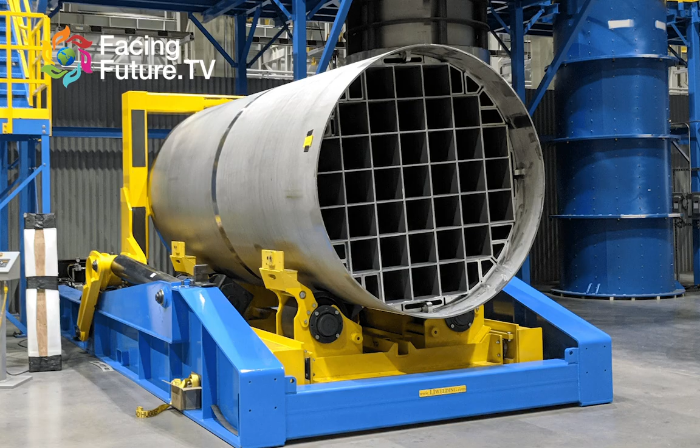Let me start by sharing an image of the thin-walled canisters. This particular one is manufactured by Holtec International, and this is what's used in the United States.

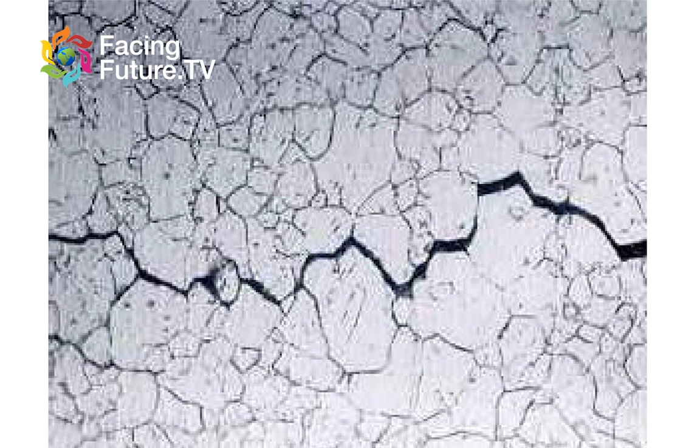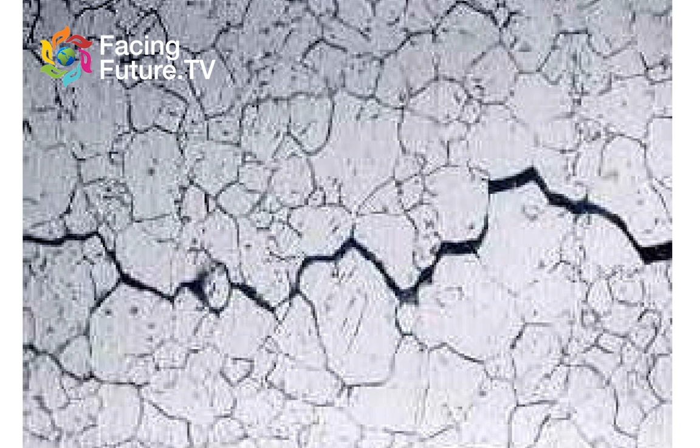Notice the walls are very thin - it's a half-inch thick wall, and that is our protection from nuclear waste in the United States. I want to go on to this image and ask you to explain what we're seeing here. Well, the Nuclear Regulatory Commission says that these canisters, they're stainless steel, are vulnerable to cracking, and this is a microscopic blow-up of what the cracks look like.

This isn't an actual canister, but this is the same material. And once a crack starts in stainless steel, it continues to grow through the wall undetected. The NRC told me, and they've put this in writing, that it will take about 16 years for the crack to grow through the wall.

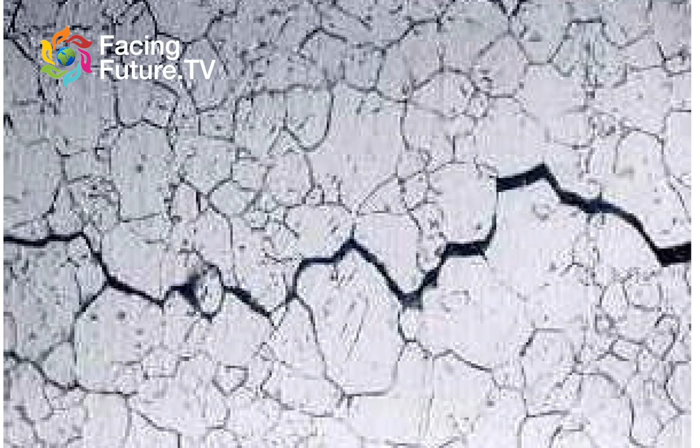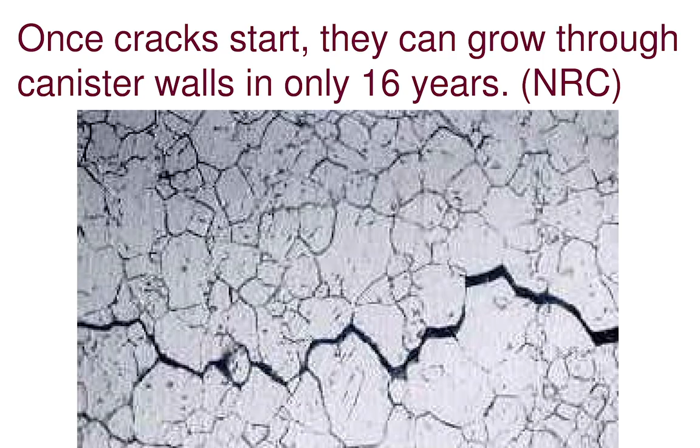Now, I always like to explain the acronyms - NRC is the Nuclear Regulatory Commission. They stated that once a crack starts, it will continue to grow through the wall, and it will take about 16 years to grow all the way through. I was actually at a meeting when they said this, and I was shocked that they have no plans to be able to find the cracks or repair them. This was unbelievable information, but it's true. And unfortunately, we have about 3,200 of these canisters currently installed around the country.

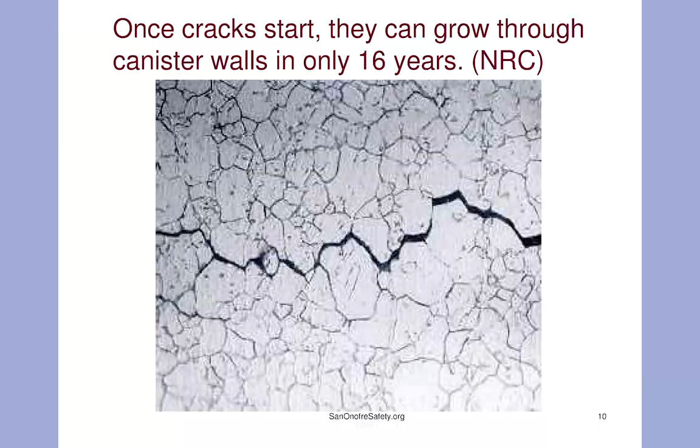Again, to be fair, this image is not of one of these canisters cracking, but of similar stainless steel subjected to conditions similar to what the canisters are subjected to. Is that correct? Correct. So that's not actually one of these canisters in use, but as we'll learn in a few minutes, this could be happening invisible to us, with no way of detecting it.

And some canisters are already 27 years old - the ones at Calvert Cliffs in Maryland are already 27 years old. And the only thing the NRC has done is eliminate the requirement for them to measure radiation levels at these outlet air vents where these canisters are stored inside.

So rather than enforcing greater inspection and regulation, they've eliminated the requirement to measure? To measure radiation out of the air vents - we're going to go into the air vents later - but to measure the radiation where the highest levels will be with through-wall cracks, yes. That's their answer to nuclear safety, is stop looking. Exactly. Hide the leaks from the public.

This is the Nuclear Regulatory Commission that you and I know is called a captive regulatory agency, because they are pretty much controlled by, owned by, the industry they're supposed to be regulating.

Well, you have 5 NRC commissioners. They are appointed by the president, but they have to be confirmed by the Senate. And when Obama was president, he could only get one safety-conscious commissioner approved through the Senate. That's part of our problem - because the Senate was controlled by the Republican Party, or perhaps by industry lobbying of the Democratic Party as well, to be fair. Well, it would be interesting to see how things change, but it's kind of been historical that the Democratic Party puts more safety-conscious commissioners forward.

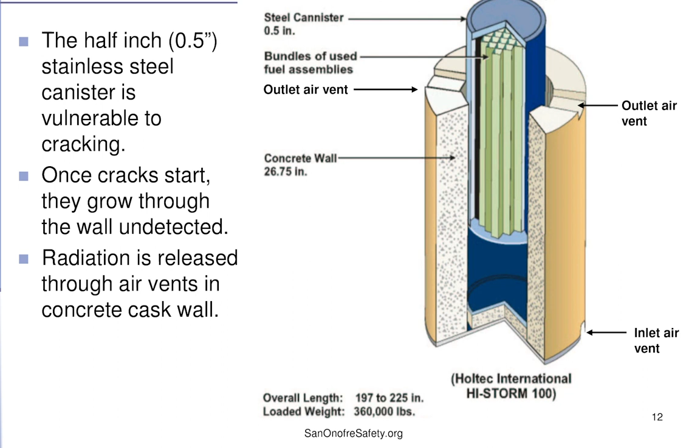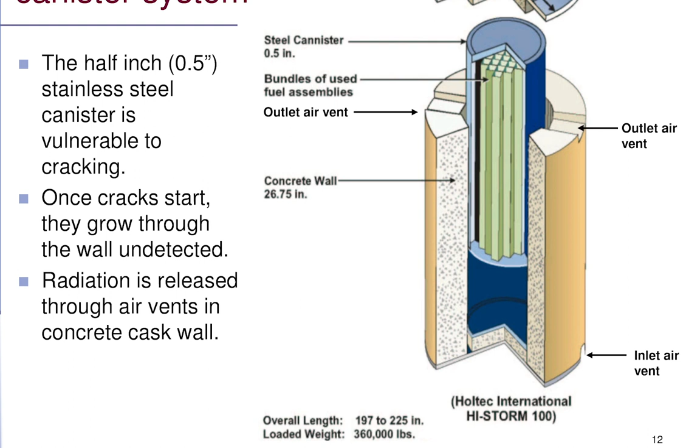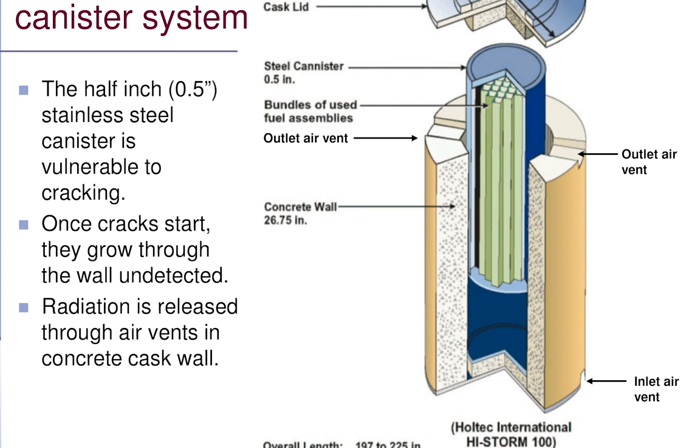So what are we looking at here? What we're looking at here is a typical canister used in the United States. This is an above-ground canister. The blue is the thin-wall canister, half-inch thick, stored inside a concrete cask with a steel lid on it. The thin canister doesn't stop gamma rays and neutrons, so it always has to be surrounded in something like thick concrete, or you would die if you stood next to it.

And the problem is there's air vents in that thick cask. You'll see inlet air vents at the bottom and outlet air vents at the top. The air goes in the bottom, comes out the top, and that's critical to cool this canister and the fuel,

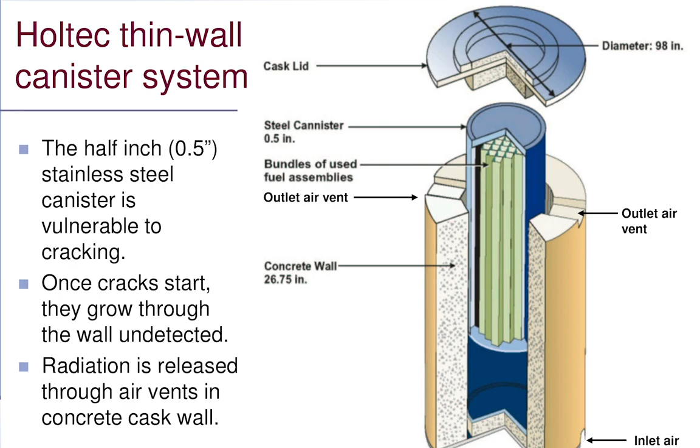because the canister is hotter than a furnace, and it has to be continuously cooled. So these canisters now are sealed, and they are welded shut. They're not bolted. They can't be opened.

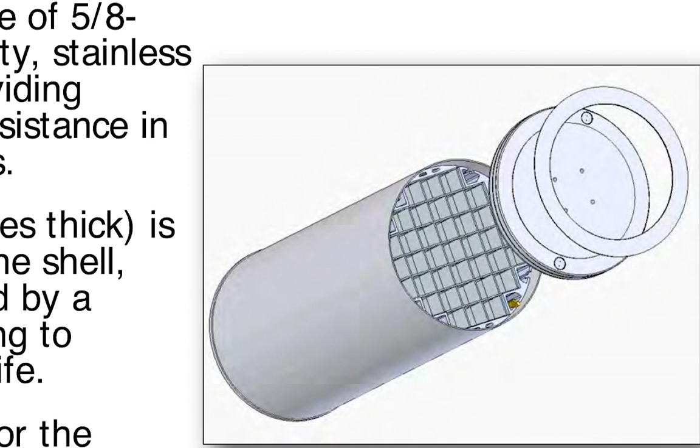These are pressure vessels, yet they have no pressure monitoring and no pressure relief valve. The Nuclear Regulatory Commission gives exemptions from typical safety standards that people have to meet with pressure vessels.

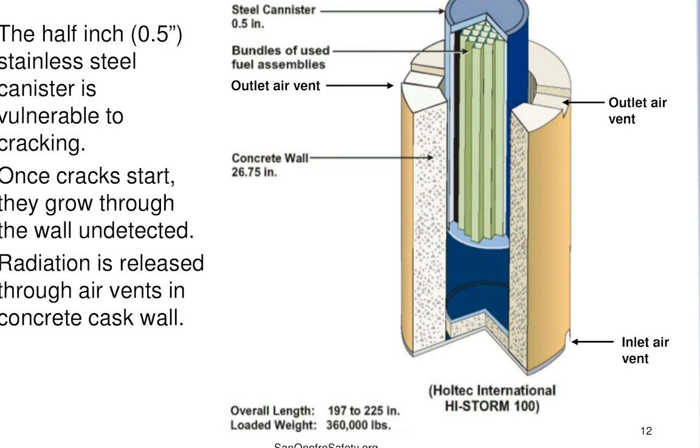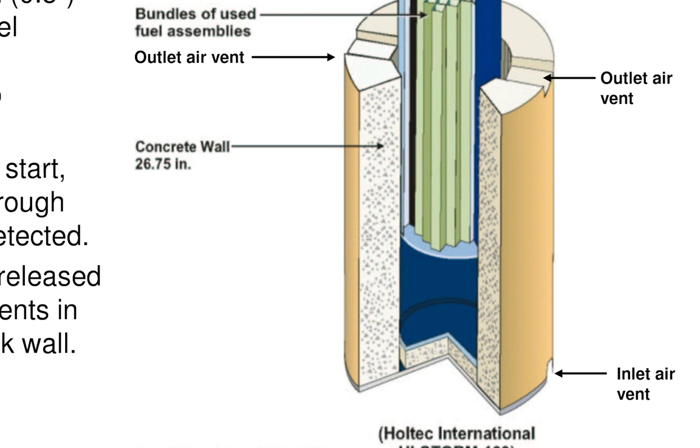I want to call everyone's attention again to the fact that there is airflow required to come in through the bottom, cool air, and warm air out through the top, because these waste storage fuel assemblies are still hot when they're put in there. If these thin-walled canisters develop cracks and there is a leak, that leak will come out naturally vented through air convection. Let's take a look at the assemblies themselves.

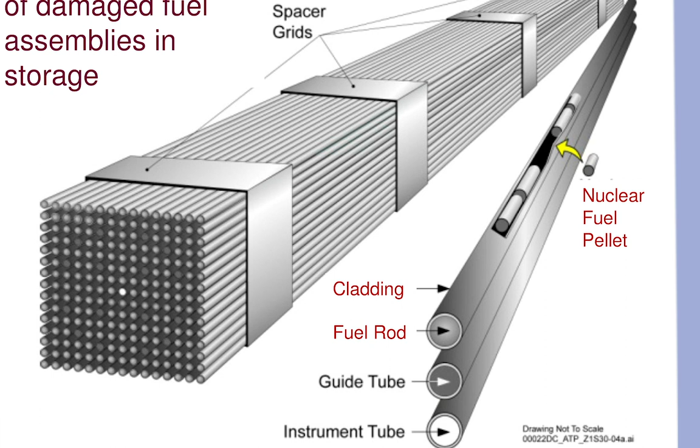So these are the nuclear fuel assemblies. A fuel assembly is made up of those rods you see to the right. The nuclear fuel pellets, these are uranium pellets, are inside. They're stacked one after another, about the size of a pencil eraser. And those rods with the fuel pellets in them make up that one assembly.

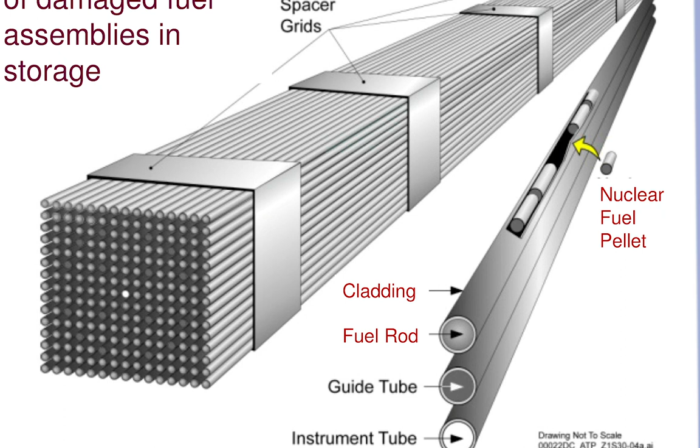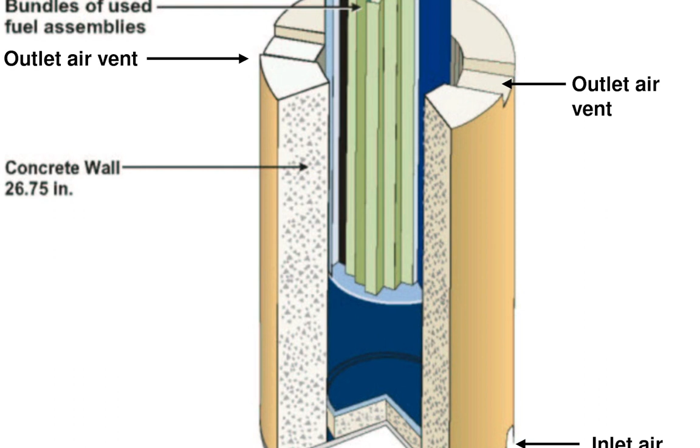So there's a whole bunch of fuel rods in one assembly. You've got perhaps several hundred rods grouped together, and within each rod there's dozens or perhaps 100 or more of these tiny little pellets. That is what the green honeycomb you called it before is. Right. And there's usually 24 to 37 fuel assemblies in one canister.

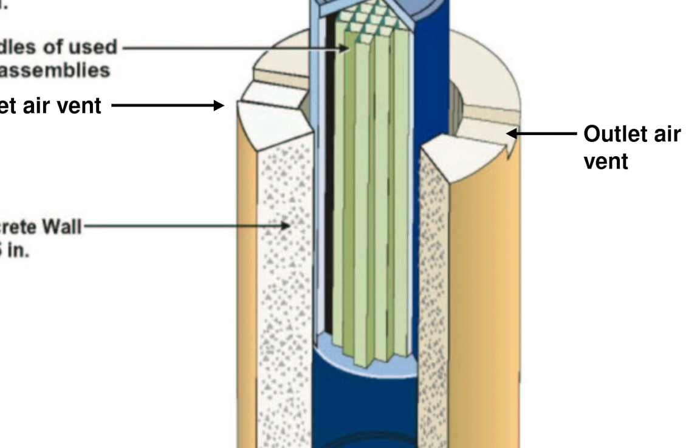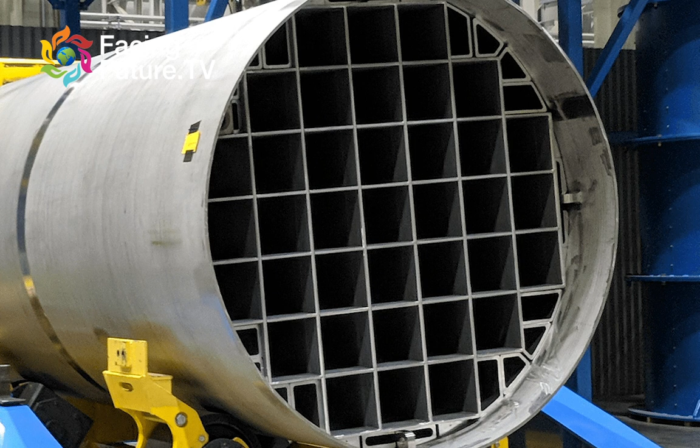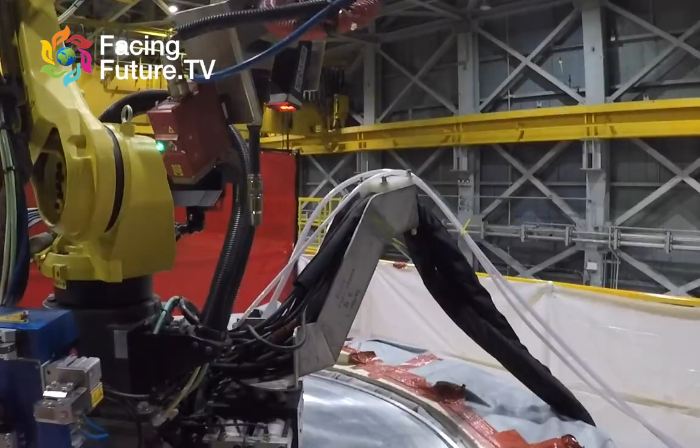Okay, I'm going to skip around. I want to go back to the beginning, that initial photo we showed. There you're seeing the holes in which those assemblies are loaded. They call that a basket, a fuel assembly basket, and each fuel assembly bundle goes in, one in each slot. Then a cover is put on and it's welded shut. They have a thick stainless steel cover, and it's welded shut.

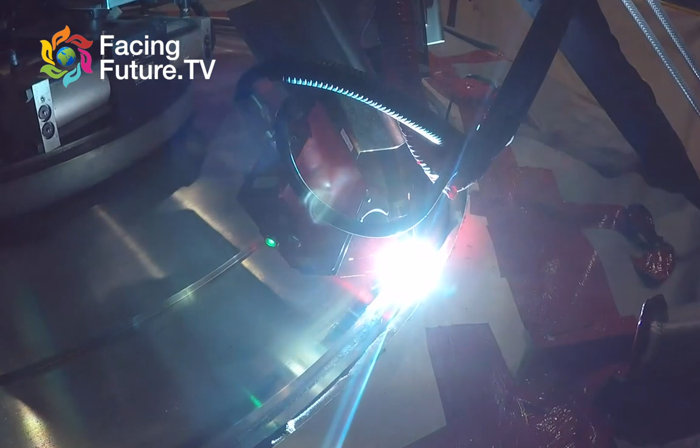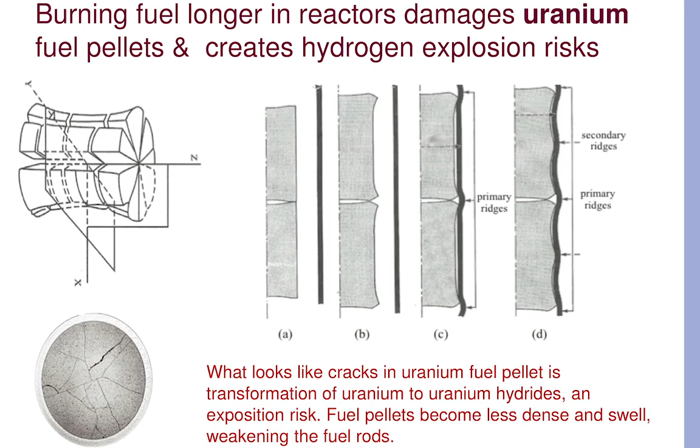And the fuel is not adequately inspected before it goes in, and it actually degrades during dry storage. When you burn this fuel in the reactor, you end up creating highly radioactive fuel rods, with the cladding and the fuel pellets getting damaged and building up hydrogen in them. The big concern is that these may fall apart during storage or in transport.

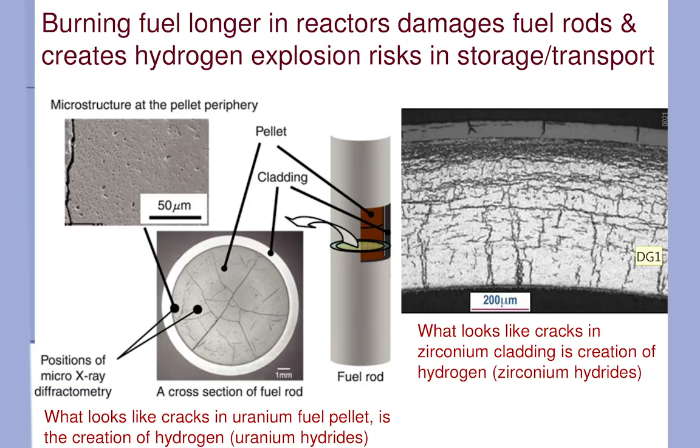The NRC is actually concerned. They don't know if these rods, with normal train vibrations, would withstand a trip on a train somewhere else. They've already been stressed out by the radiation coming from within, from those little pellets.

And the canister is filled with helium so that nothing explodes, because you don't want oxygen in there—that's an explosive thing to have in this system. So they fill it with helium because it's an inert gas, but they have no way to know if the helium is leaking out. They have no monitoring system to know what's going on.

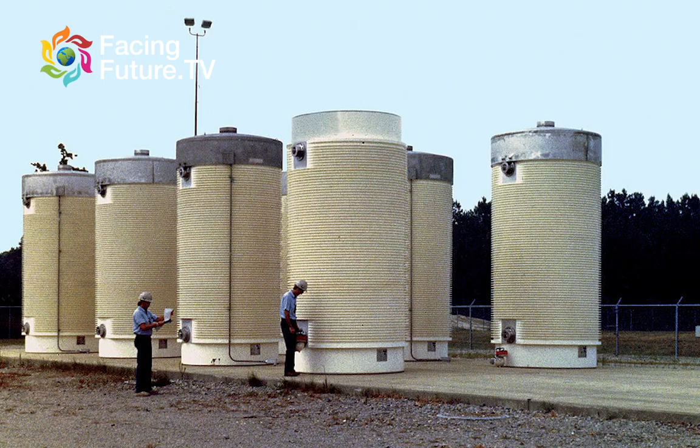And they only check the radiation levels from the air vents once every three months. They walk around with a monitor on a stick and check it. But now they're only checking the inlet air vents, where radiation levels would be lower. There's some radiation that comes out of those vents anyway.

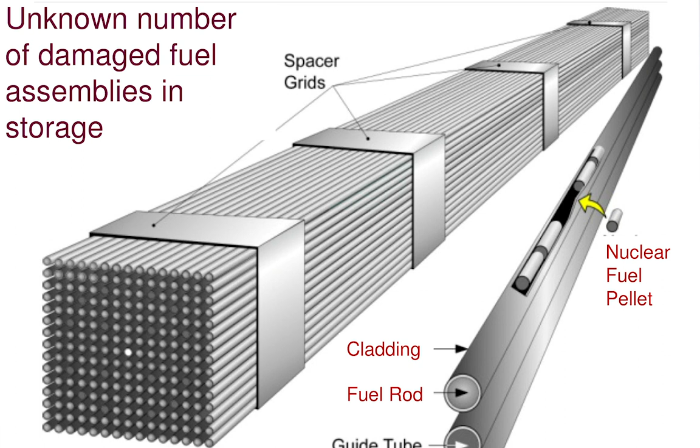They do monitor for temperature—there is temperature monitoring, but none of that monitoring is going to give you a warning. There's nothing that alerts you soon enough to do anything about the problems. We will only know after it's too late, after major radiation leaking is happening. We won't know before, and then we'll only know if the NRC tells us or if the canister explodes.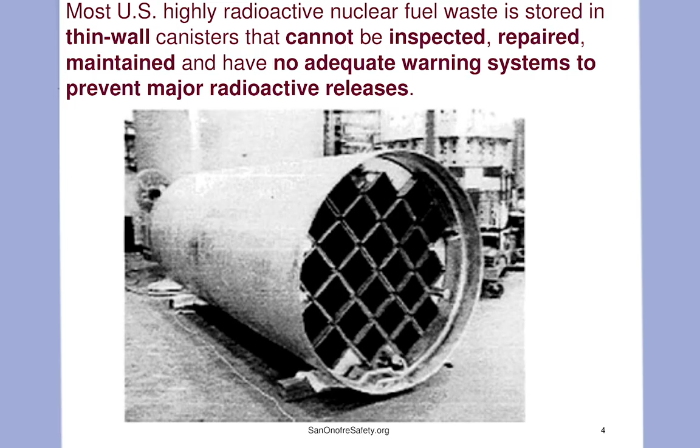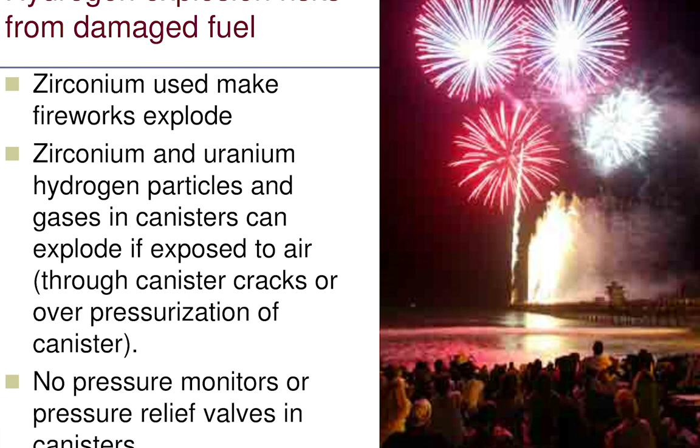So they're vulnerable to hydrogen gas explosions. If air or water gets in, you have a potential issue of an uncontrolled nuclear fission reaction if water gets inside. We have two potential classes of problems there. One is that there may be an invisible leak of radiation of potentially major proportions.

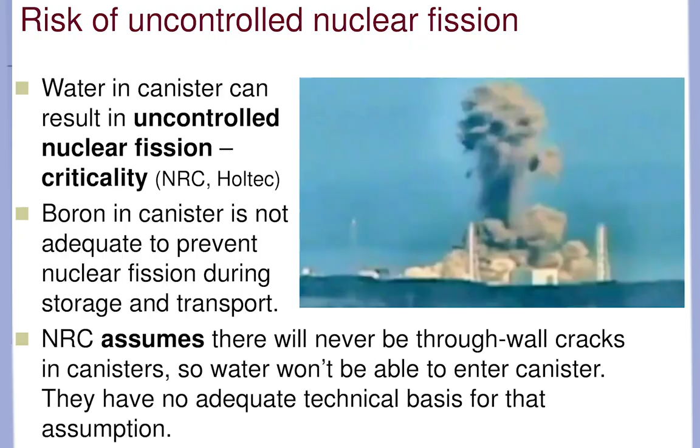Now, you've already told me that there are minor, small amounts of radiation that come out of these and are vented into the air in the natural course of doing business, shall we say?

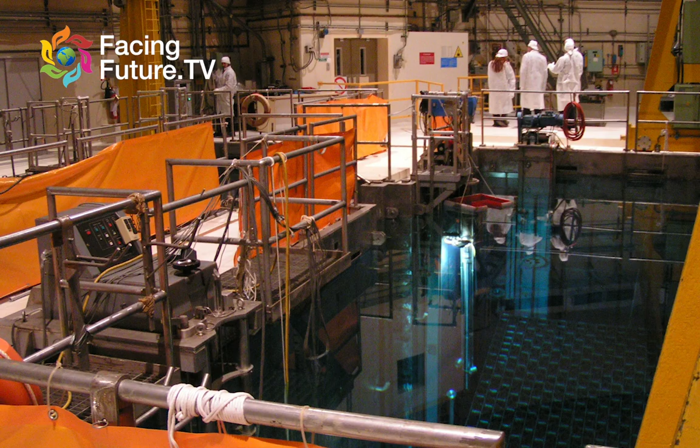The thin canisters don't stop gamma radiation or neutrons right off the get-go. We have some canisters at San Onofre. Somebody measured the inlet air vents on those, and some of them were measuring 200 counts per minute, others 800 counts per minute. I haven't been able to get anybody to say why the counts are higher in some rather than others, or they're just kind of hiding information from us right now.

Those are 17-year-old canisters, some of them. When you say counts, we're talking about Geiger counter clicks. Yeah, and some of them are 2,000 counts per minute. That's like click, click, click, click, click, click, click, click - fast clicking.

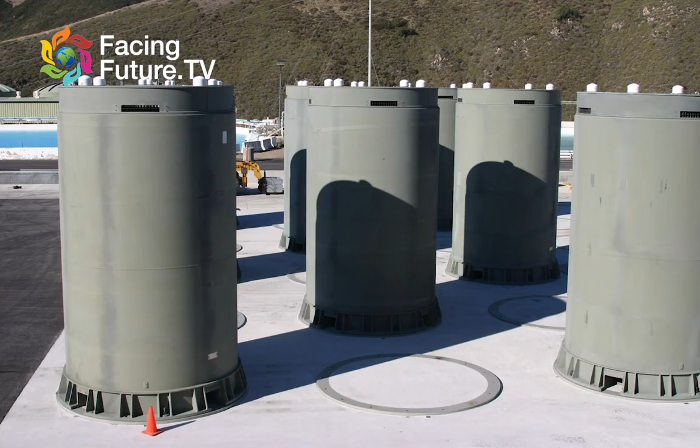So we've got a lot of them leaking a lot of radiation as it is. Going back to your presentation, what we're looking at here now is above ground, thin-walled canisters. The thin-walled canisters are inside these thick wall casks, made of concrete and lined on the outside and inside with carbon steel. You'll see in the bottom right, one of the air vents - there's like 4 air vents at the bottom, and at the top, another air vent.

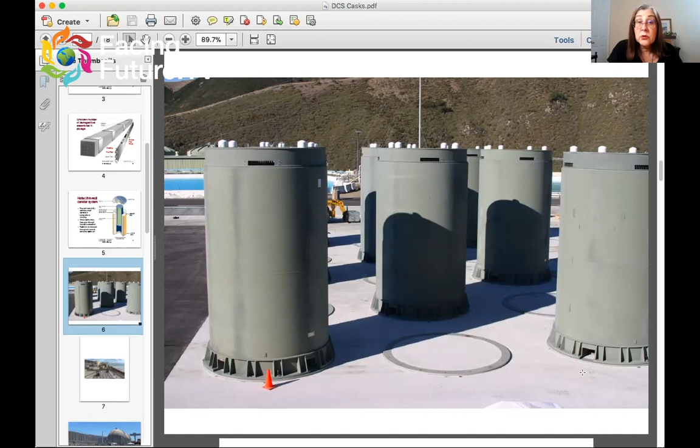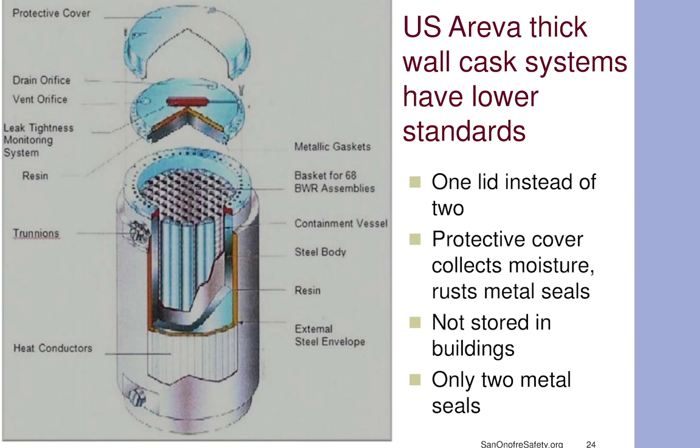That's the air cooling system. This picture happens to be from Diablo Canyon, and they store them very close together, sitting out in the ocean air. The NRC admits the ocean air is one of the things that can corrode and start the cracking process in these canisters. But we have no idea, because they have no inspection technology that can go through those air vents and be able to see cracks. It just doesn't exist. These canisters were designed to not be inspected.

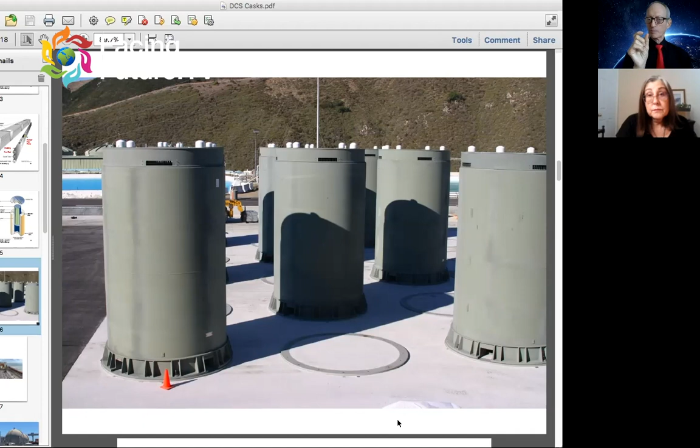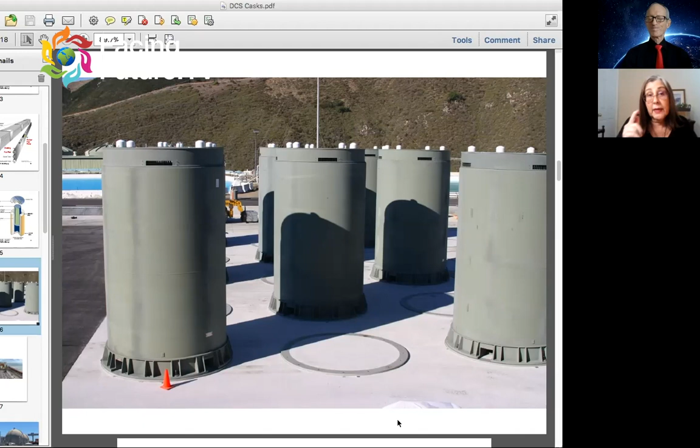The American Society of Mechanical Engineers sets standards in this country. The only way you can find cracks, it's approved, is by putting a fluid dye on the surface of the cracks and see where it runs in the cracks. And you can't, once you put this hot radioactive fuel in there, use that option.

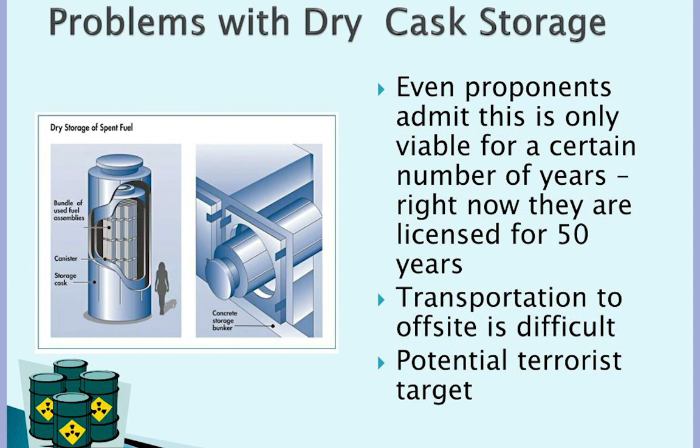So they knowingly stored the most lethal material on Earth in uninspectable canisters, assuming after 20 years, these utility companies that bought these could turn it over to the federal government, so the federal government would have to figure out what to do with this mess. That's the nuclear industry plan in the United States.

We call that an externality. The companies that run these power plants are more than willing to leave taking care of the waste as an externality, with the expectation that the government - when I say the government, we mean the taxpayers - are going to pick up the tab.

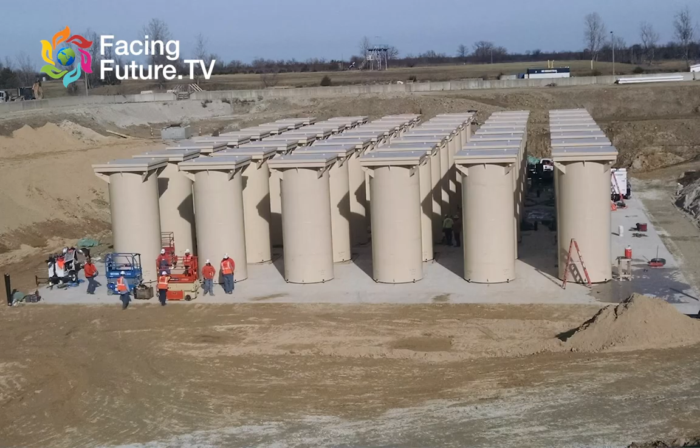Yes, and there's no funding for dry storage. So they wanted the least expensive. I mean, these were roughly $4 million a piece, each one of these, and that was the less expensive option. They just chose the least expensive. There's no fund anywhere to pay for these dry storage containers.

Could you hazard a guess as to what the thicker walled casks cost by comparison? We're going to discuss those in a minute. The forged steel cost - Prairie Island paid $6 million a piece for those, but the lifespan is going to be longer for the thick ones. They don't have the cracking problem. So they really are less expensive if you look at past 20, 30 years, and they're maintainable.

And they're the ductile cast iron - we don't have a cost on those. I was told that they would be competitive to the thin ones now because ductile cast iron is less expensive, but I don't have any numbers. We can't get any U.S. utilities to even allow the thick ductile cast iron bids - they won't even allow them to bid the jobs.

Okay, let's go back to your slides again - and again, those are the above ground concrete casks. Yeah, there's three companies that make above ground systems: Holtec, NAC, and Transnuclear. They make the thin wall canisters. That's pretty much it. Okay, but they're equivalent.

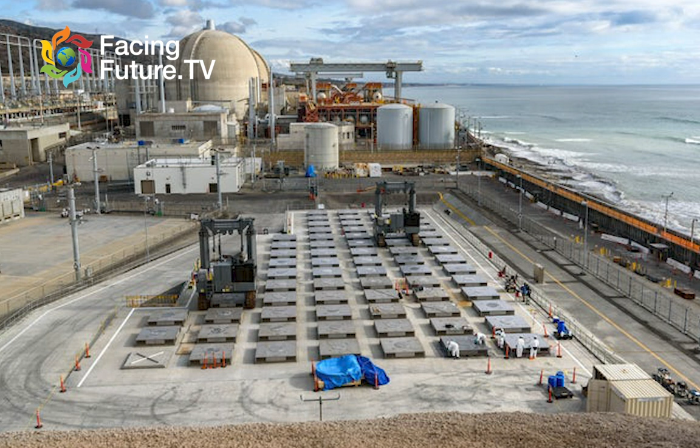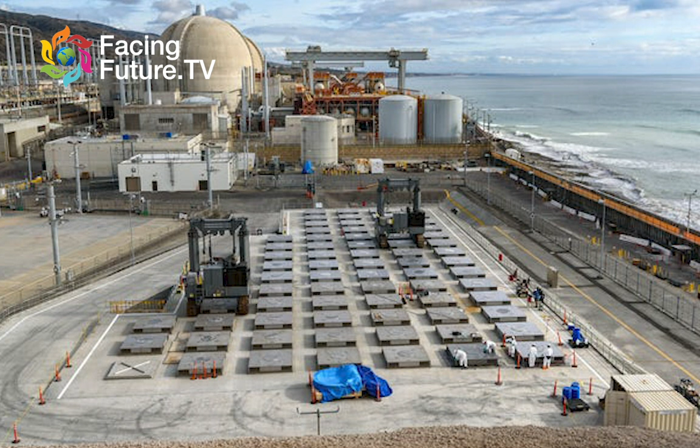Now what we're looking at here is the decommissioned San Onofre nuclear power plant. What I'd like to call people's attention to is how close it is to the Pacific Ocean. It's perhaps 40 yards away from the ocean, from salt air. Over 100 feet, yeah.

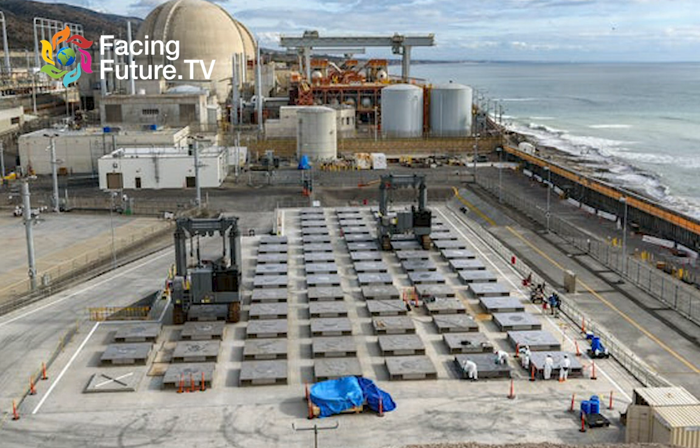Now you've also told me that what we're looking at here is the area where the canisters will have been installed by now, but that does not show them because they weren't installed when this photo was taken. Yeah, Southern California Edison likes to share this picture because it doesn't show the huge air vents, making it look like everything is all sealed up below ground. So it's a very misleading picture, a bit of propaganda.

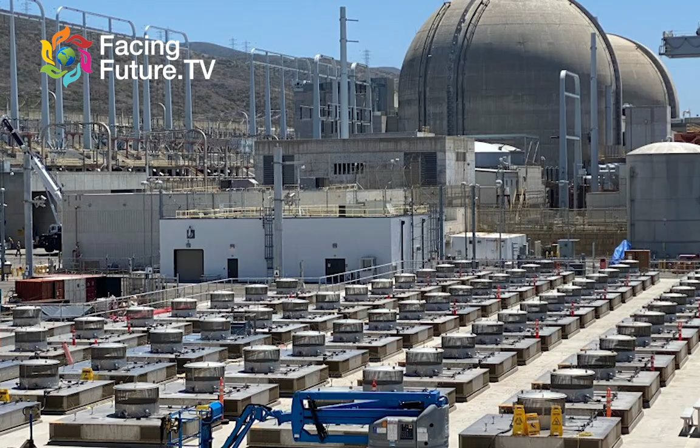Yeah, and so if you look at the next picture, now you can see the air vents on there. The lower rectangular part is the inlet air vent, and the round one on top is the outlet air vent. The air is supposed to go down the inlet vents, kind of like a fireplace, and be sucked up through the middle and come out the top.

If water can get in there, moisture can get in there, we get fog. There's no drain in the bottom, so water gets in there. There's no drainage system. It's really a bad experimental design.

It's only used in one other place in the country, but this is a system that Holtec wants to put in New Mexico. This is what I would consider an experimental system, used only in one other place currently. But there are almost 100 nuclear power plants in the country.

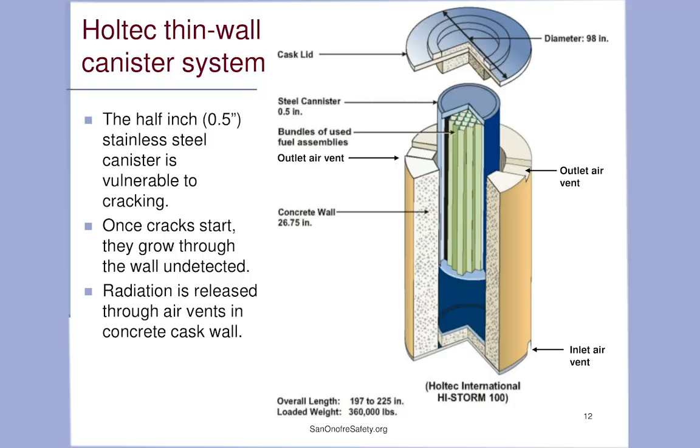So how are they storing their waste? The majority are in the upright casks that we looked at earlier, the upright thin wall canisters with the concrete and the air vent, above ground. Everybody else is pretty much above ground.

The ones we're looking at? Oh no, the ones we're looking at are below ground. At San Onofre, we actually have this, and then we have an above ground system also.

But you've got air vents coming in and going out, and I don't know how fine that mesh is on the inlets and outlets. I have to believe that insects can get through there. Yeah, well, all of the vent systems have to periodically be cleaned out. All kinds of little critters make nests and things in there, and that can shut off your cooling system. So that's one of the maintenance items, is to clean out the vents.

So that the canisters don't overheat and the fuel doesn't overheat. At least they do that much. More or less, yeah, more or less.

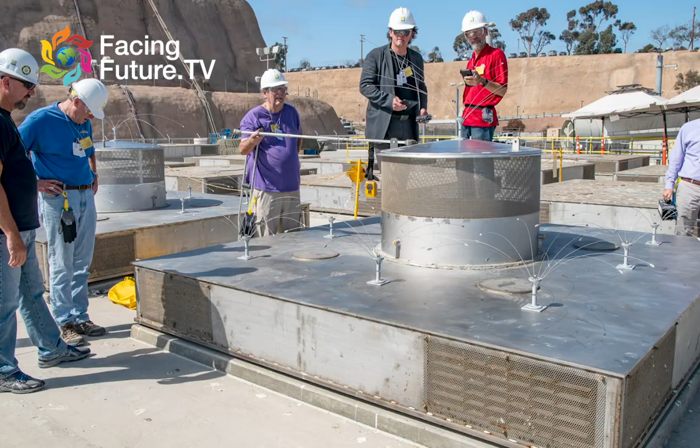Now the next image is interesting. We discussed that, and I find it quite interesting. So what's going on here? Yeah, this is a closer up view of one of the canisters.

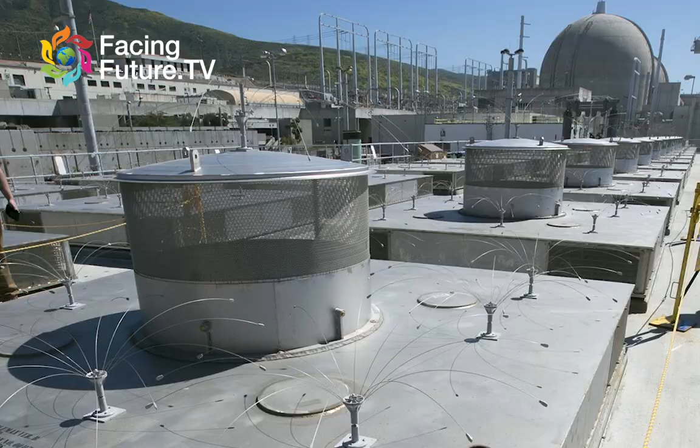You can already see that's rust, where those thin air vents are, and they're huge air vents around. Every corner has an inlet air vent, and then the top is the outlet. So the canister's right under that lid. It's exposed to coastal weather, and this was installed not even a year, and you're already seeing rust on the vents there.

And pigeon poop, and everybody knows that bird poop is quite corrosive in itself. Yeah, the seagulls, they put these little spikes on there to try and keep the seagulls off. Yeah, they were pooping in there, and it was spilling into the vents and all of that.

Those men that you see there are taking radiation levels from those vents. Those measured about 350 counts per minute right now coming out of those.

This is an example of the only other alternative to thin wall canisters. It's a thick wall cask system. Thick wall casks don't use the thin canisters, they're thick wall metal casks. They're 10 to over 19 inches thick, instead of half an inch thick, you've got 10 to 19 inch thick walls.

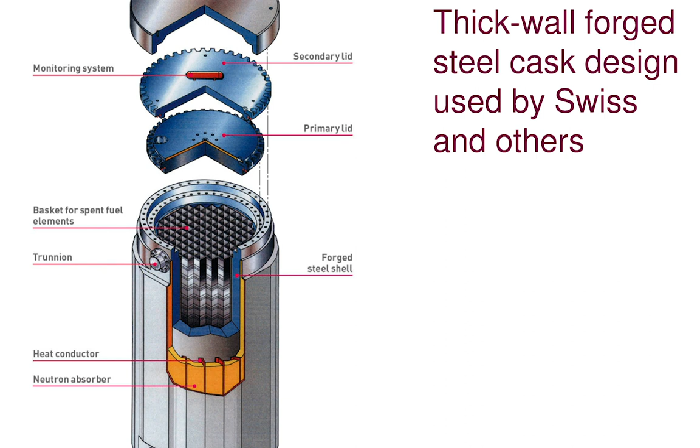Of stainless steel. Well, of either forged steel or a ductile cast iron, these are containers that don't have cracking issues. And the exterior has a coated epoxy on it. You can get next to them, so they're maintainable. The better thick wall cask systems have double lids, double metal gasket seals.

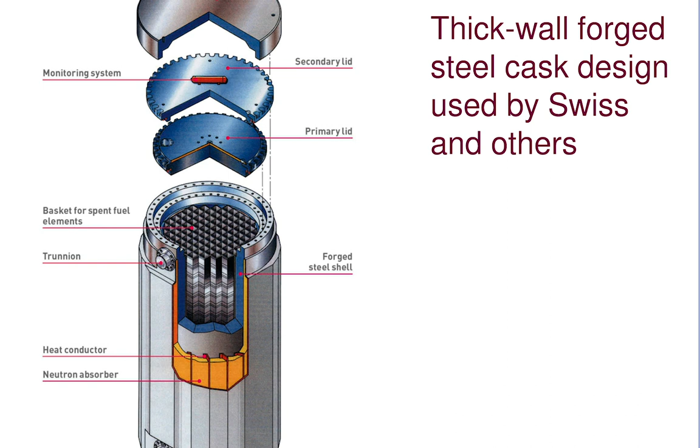They have a pressure monitoring system, so if a seal needs to be replaced, they get an early warning to replace it. You can actually open it up and inspect what's going on inside.

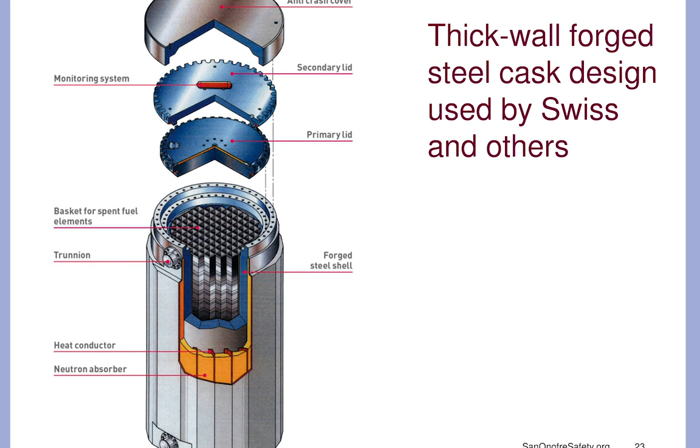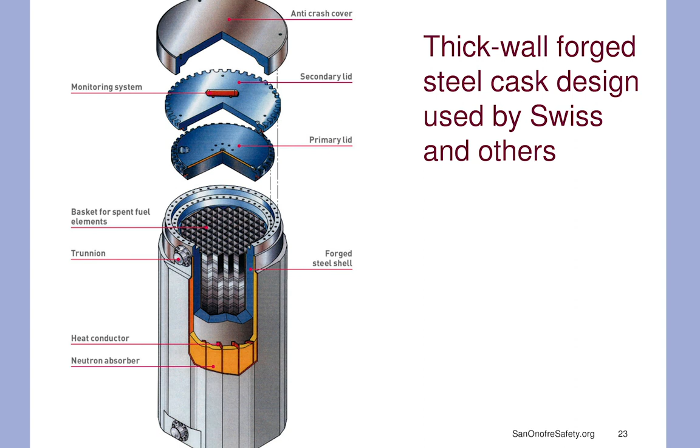So it's a fully inspectable system. It's designed for longer term maintenance, both inside and out, and it's designed to be able to retrieve the fuel out if you need to put it in another container. The thin ones, you can't do any of that.

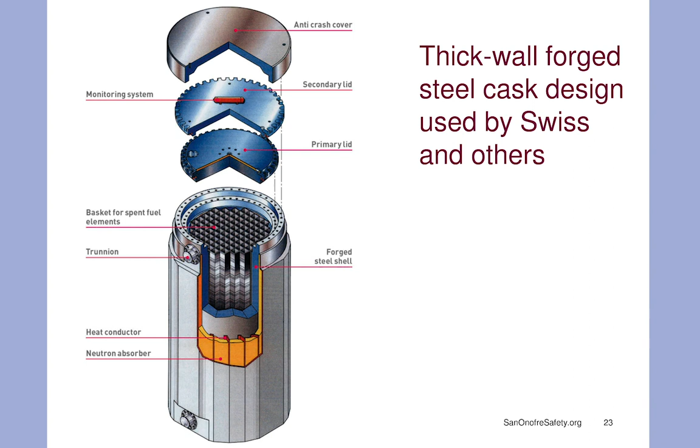All of this crenellation on top, all this complexity you're seeing here, is places where they can be bolted. Yes, these are bolted, independently bolted lids, so you've got redundancy. You've got double bolted lids, you only need one lid. You've got double metal seals in each lid, and you only need one seal for protection. It's got a lot of redundancy built into it.

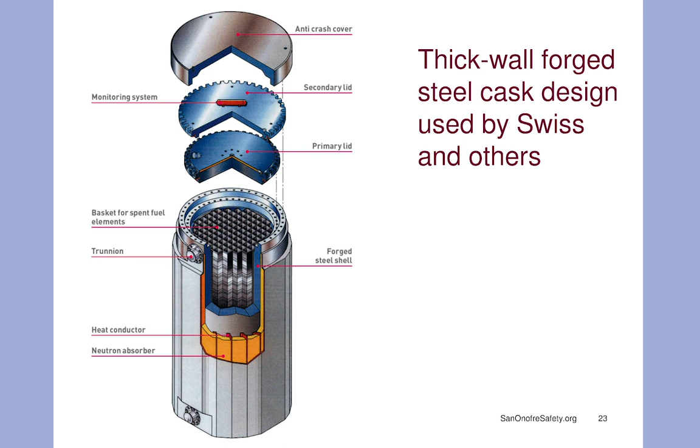And then you have something on top called the transport lid. That top lid is there for transport, added for additional protection in case there was a crash on the edges. So that's put on there for transport.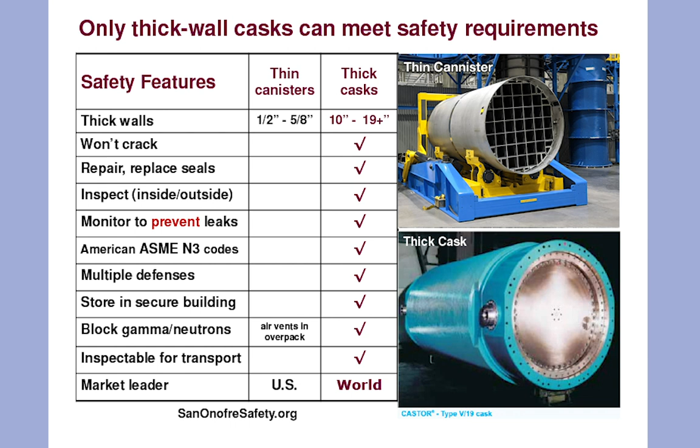I'd like to go and compare the two systems, what we use in the United States, the thin-walled system, and then the thicker system used in most of the rest of the world. So would you go down the list and tell us what you know? Not all of what you know. I've discovered that you know too much. I know too much. Yeah.

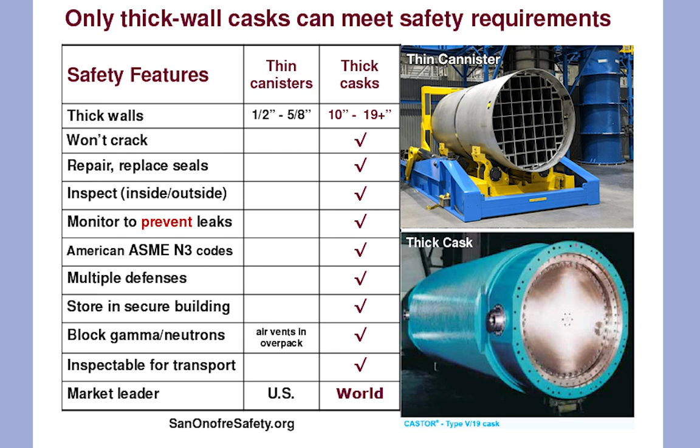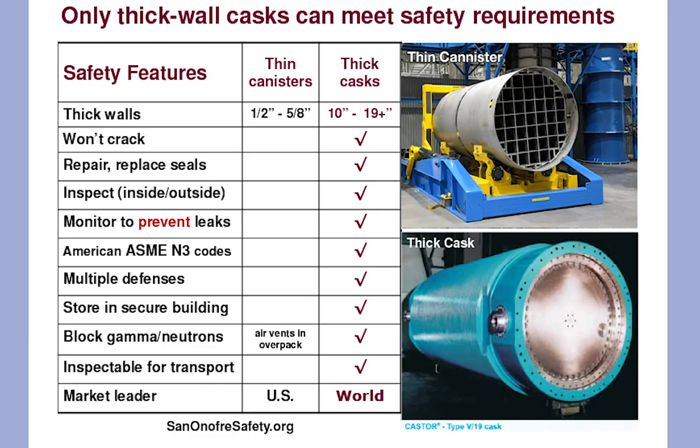So there is no repair technology for the thin canisters. They can't repair, they can't even find the cracks, let alone repair them. They can't inspect them inside or out. There's no monitoring system that will alert you to problems so that you can fix them before you have radiation or helium leaks.

The thick casks are the only ones that meet American standards of mechanical engineers, the ASME N3, which are specific American standards for nuclear pressure vessels used for storing and transporting nuclear waste. We have American standards that only other countries are meeting. So if we required ASME N3 certified containers, we would only have thick casks in this country.

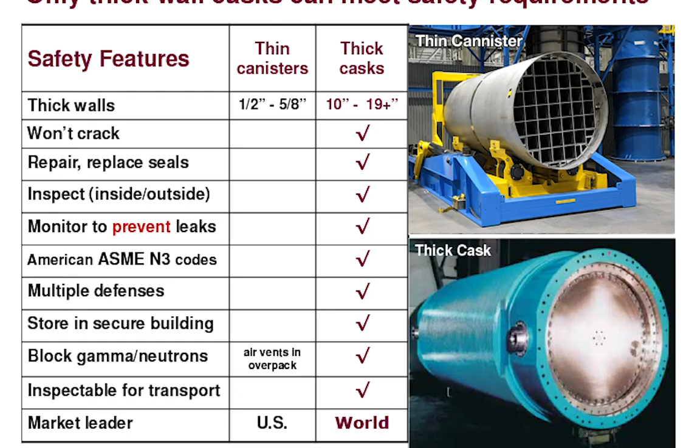This is one of those oh my God moments. Yes, it's crazy. And running down the rest of the list, the multiple defenses: with the thick cask you have monitoring, you have redundancy, you have the thick walls, you don't have the cracking vulnerabilities, it's fully inspectable, designed for longer term use.

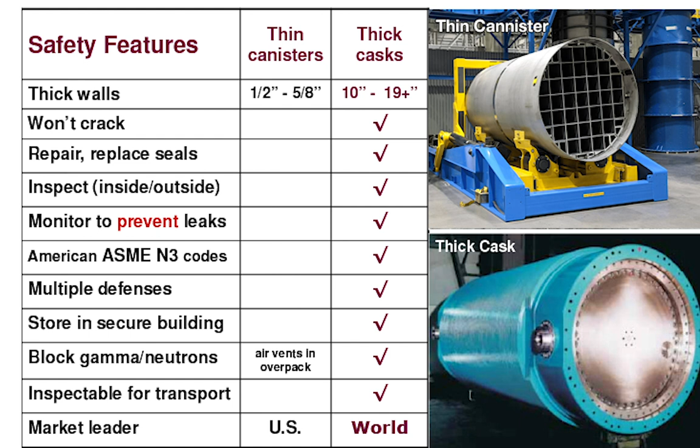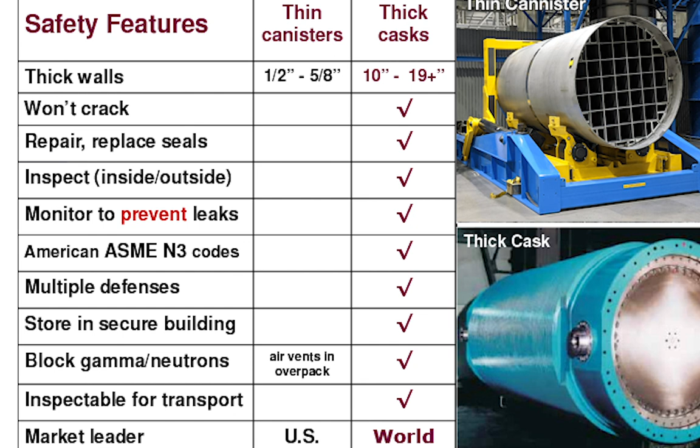There's also the Nuclear Waste Policy Act, a federal law. Before you can transport, you're supposed to have it stored in containers that can monitor and retrieve the fuel. So only the thick casks meet the current law requirements to take this waste from where it sits now and give it to the Department of Energy. So it doesn't—wait a second, we've got laws in place which make the systems we use illegal.

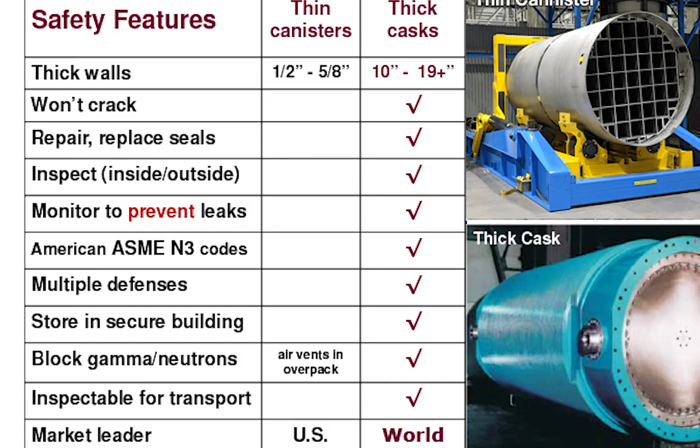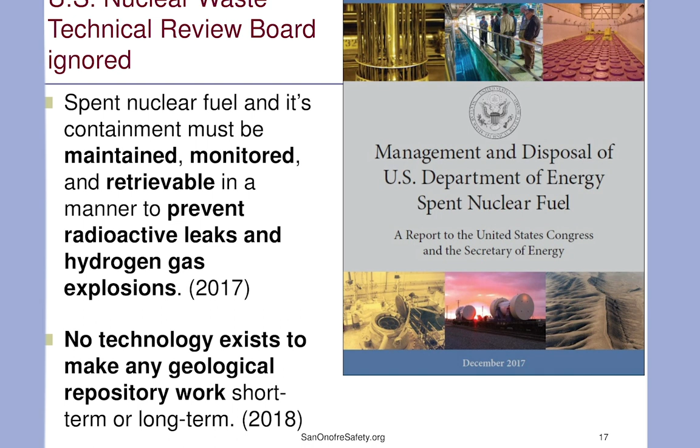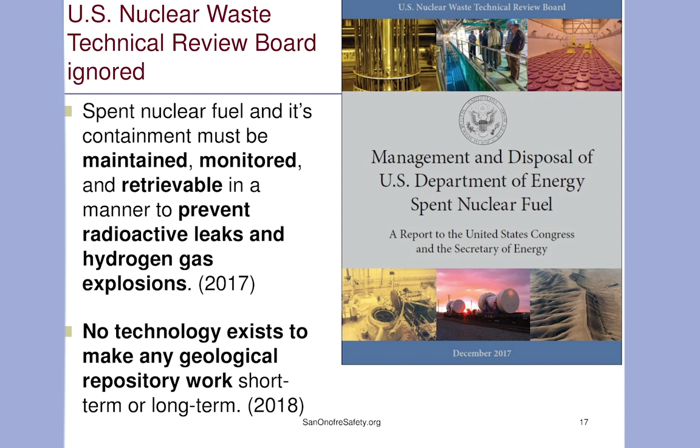The law requires the DOE, the Department of Energy, to only use monitored retrievable systems. The Nuclear Regulatory Commission is choosing to ignore that law. When I brought this up to Mark Lombard, director of spent fuel management at the NRC, he said that law doesn't apply to us, it only applies to the DOE. I said, but these containers are supposed to go to the DOE eventually. His answer to me was, well, that's the DOE's problem, that's not our problem. That's the attitude of the director in charge of approving all these containers. That's what we're dealing with.

Another oh my God—I could not believe that. When I heard this, I had no idea. I assumed if you're handling and storing nuclear waste, you're going to have the best systems, the regulator is going to be closely regulating, and the utilities are going to be extra careful because the consequences are so disastrous. I had no idea the exact opposite was true in this country.

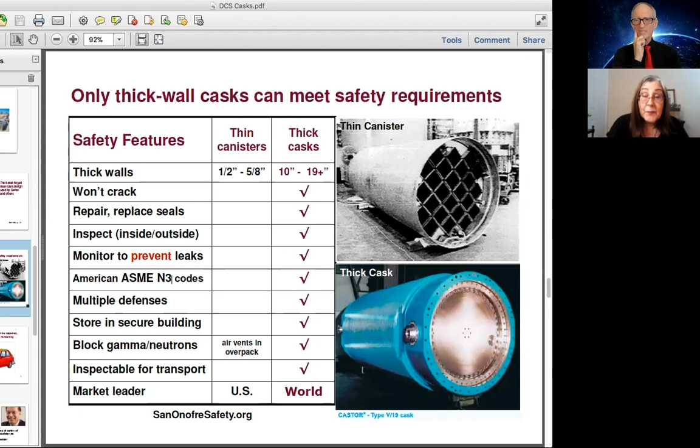It could not be called the Nuclear Regulatory Commission. I'm trying to think of a better title—the Nuclear Rubber Stamp Commission is what we have. That's exactly what you read my mind. That's exactly what I would rename it.